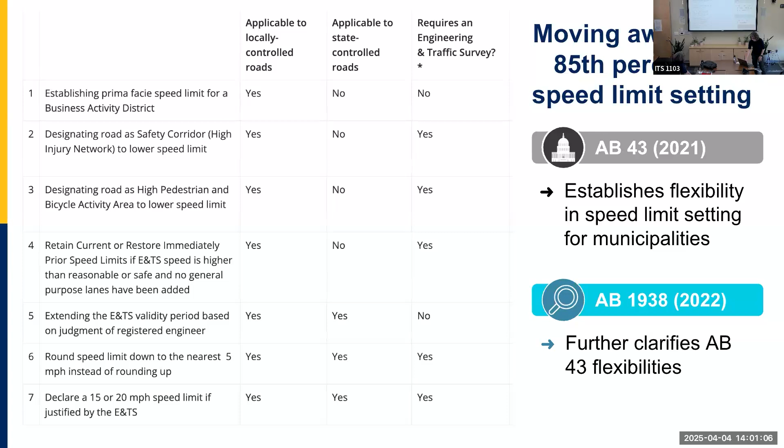Now I'm going to talk a little bit about my projects related to this. This is not research work. This was some education and engagement work, not so much on changing driver behavior, but we developed some accessible guidance for implementing the changes under AB 43 and AB 1938.

With the goal of helping cities to take advantage of these new flexibilities. The way this was implemented or funded was the Strategic Highway Safety Plan, which is a plan that's required under the Highway Safety Improvement Program. It's a federal requirement to have these plans, and it's basically a plan for the state to reduce fatalities and serious injuries, and they focus on the crashes most associated with those levels of injury.

And so in California, we have challenge areas related to these high severity types of crashes. One of those is pedestrian, and those challenge areas had action items in their plan that addressed creating this guidance and helping cities to implement these changes.

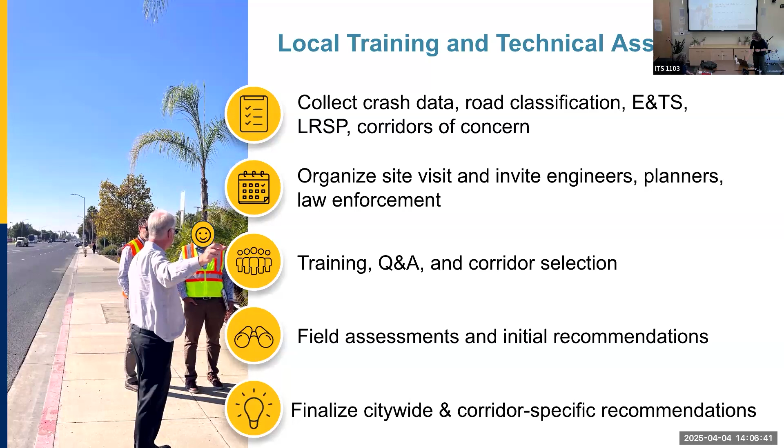So I'm going to jump briefly into something we're working on with Caltrans right now. Caltrans has a number of safety monitoring programs, both proactive and reactive. They look at locations with crash history or attributes that suggest potential for safety concerns, identify those locations at headquarters, and send them to the districts. The districts conduct a traffic safety investigation, and if they identify shortcomings in the design, they make recommendations to install countermeasures. Those are generally automatically approved for funding.

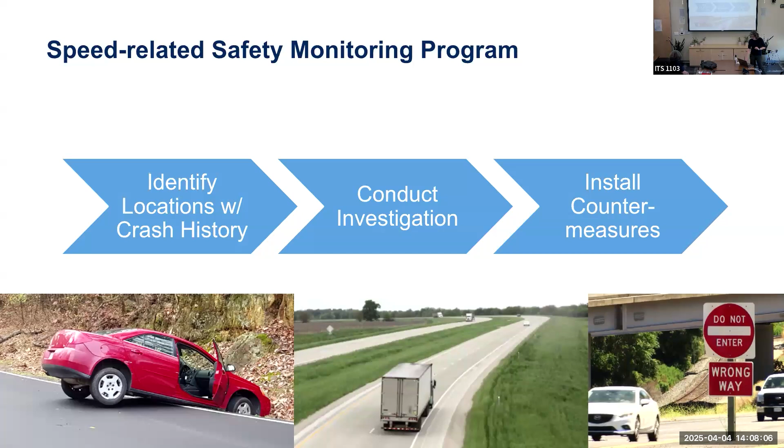And then working with the California Office of Traffic Safety. Are folks familiar with OTS? They're our state highway safety office, and they receive funds from the National Highway Traffic Safety Administration. If you're familiar with the Safe Systems Pyramid, those are some of the higher effort, lower efficacy things, but we have that funding, and it does have some impact.

For those efforts, we were looking more at road user attributes that might allow us to target education campaigns to those who might be most influenced to reduce their speed, or might have the greatest impact. Then the CHP report would look at road conditions and the types of conditions that would be appropriate for targeted enforcement to have the greatest impact.

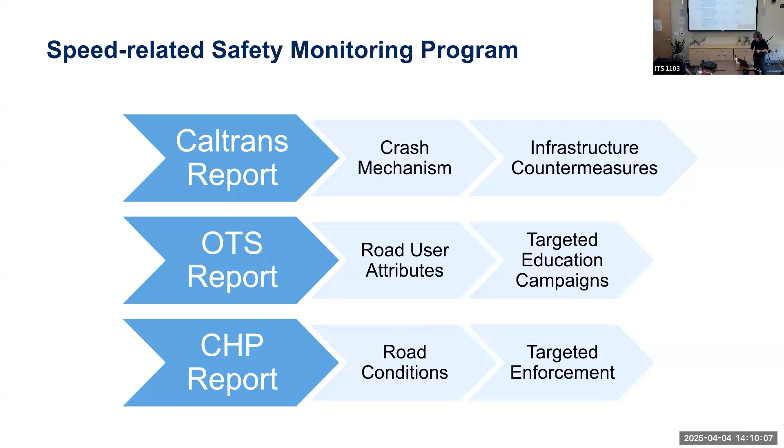So we're in progress on this project, and here's some of the data we've seen. The bar on top shows the types of speed-related fatal and serious injury crashes on non-state highways, and maybe more interesting is the state highway locations. Just to be clear, state highway isn't necessarily just freeways—you have urban arterials, expressways, and rural highways that are just two lanes, which is much of the mileage of the state highway system, connecting the urban areas in California.

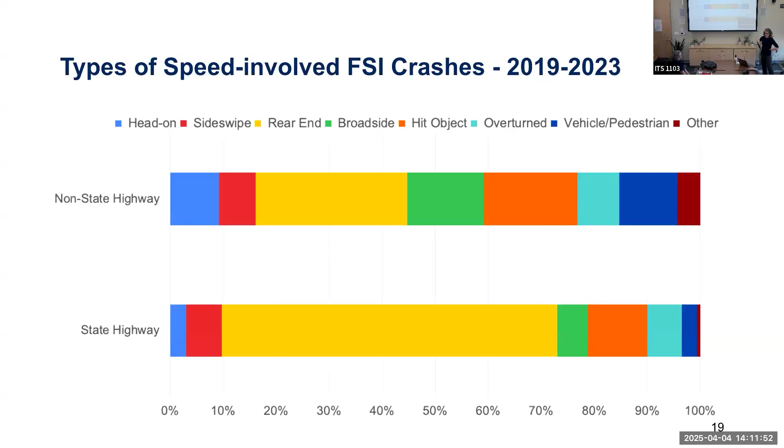You'll notice that for state highways, most of these speed-related crashes are rear ends. For non-state highways, it's still mostly rear end, but next you have hit object and broadside. I'd say broadside is more prominent because you have more intersections on non-state highway locations. But rear end, I have a suspicion, especially on freeway locations, might be back-of-queue crashes, where a driver isn't necessarily going over the speed limit but didn't see the queue forming in front of them and didn't stop in time.

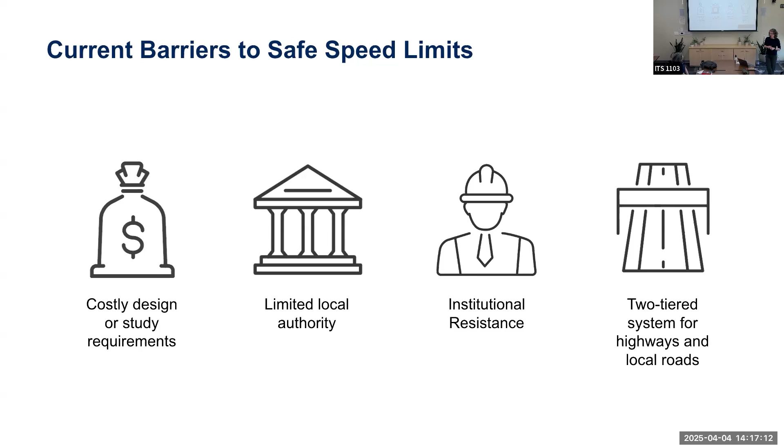With AB 43, those changes I talked about applied on local roads, and only some of them applied on state roads. So there's this two-tiered system that makes it difficult for cities that want to reduce speeds on their arterials that have the highest crash rates.

So we did stakeholder interviews and a survey. We talked to practitioners and stakeholders around the state, and we identified a couple areas of agreement: that these two bills were a step in the right direction, and that it is problematic to have this two-tiered system. There wasn't agreement from everyone on the need for reform.

And what we saw is that the folks who worked for the state DOT saw less need. Our thinking is that if you're conducting engineering and traffic surveys on rural highways, maybe the 85th percentile approach isn't the worst thing. These are locations that don't really have mixed traffic, so drivers are probably relatively okay at determining what speeds are appropriate on those facilities.

But the practitioners from cities and counties were less taken with the 85th percentile approach.

So we worked with Fehr and Peers on the case study portion of this study, and they did a lot of work looking at what jurisdictions around the US have done to better align with the safe system approach on speed limit setting. I wouldn't say there's anywhere in the US where they're fully taking this on, and part of that is requirements with complying with the MUTCD. I think that's going to change some potentially in the coming years.

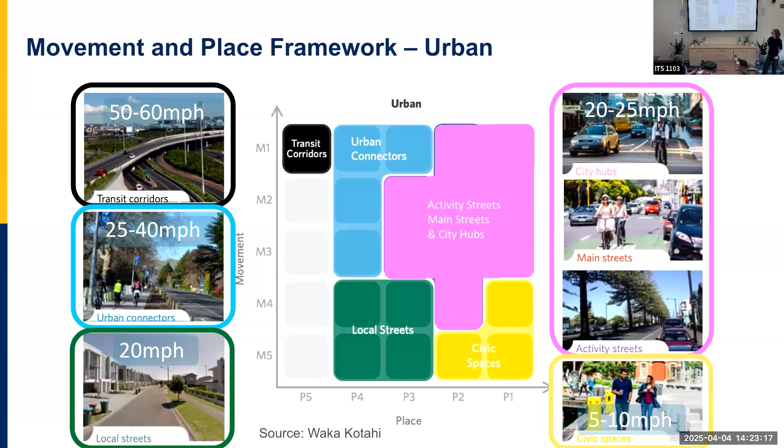So for this category of street, you'd have a baseline of 20 miles per hour as your speed limit. This is a speed where most pedestrians or bicyclists are going to survive a crash.

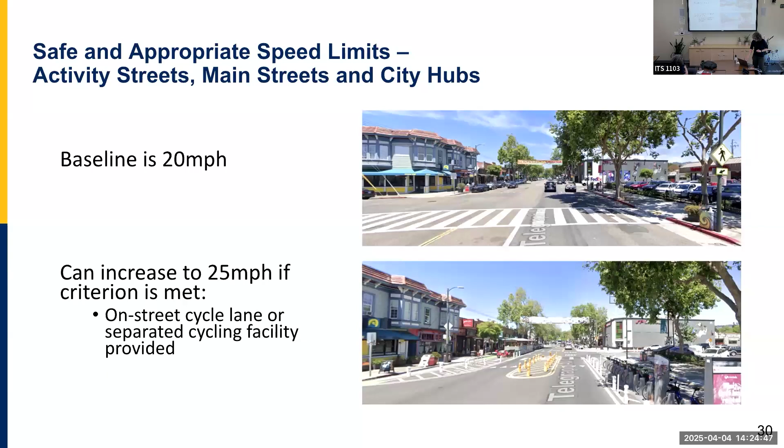The interregional connectors are maybe what we would have as expressways. So those are almost like freeways, but they're not elevated because they're in a rural area and they don't need that separation. I'll just show an example of how their framework would be applied on a rural connector.

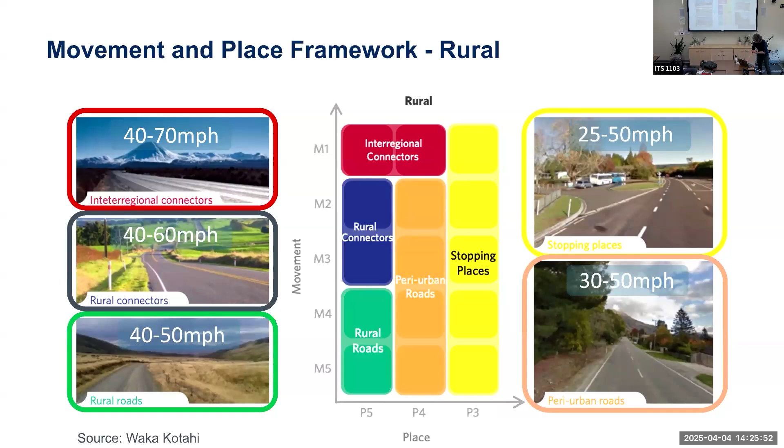So rural connectors are sort of 2-lane highways that have moderate speeds. The middle image is what I would put as more of their baseline speed, around 50 miles per hour, and that is a road that is sealed with a marked center line and an edge line.

So you would consider reducing the speed there if it had a tortuous alignment. This example is a highway that's going through a mountainous area in the state.

And then the bottom one is you could increase that speed if you added a median barrier. So the determination for speeds here versus in urban areas is more about preventing the conflicts between cars, and a median barrier is going to prevent crossover crashes, which are the highest kinetic energy crashes that you're going to see on these rural roads.

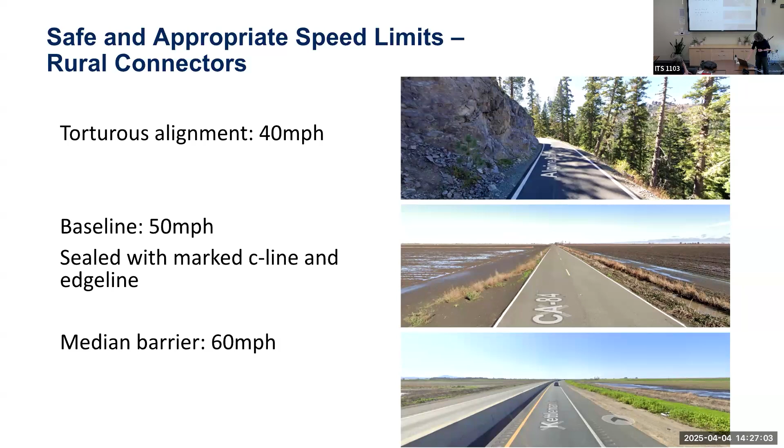So what would this approach mean for California? I think of it as flipping it on its head. What we have now is that the speed limit is based on driver behavior, and if you want to reduce the speed limit, you have to install traffic calming countermeasures to achieve that desired speed. But this would be moving to a case where the speed limit is set to minimize risk of fatality or serious injury. So if you have an operational need to have higher speeds on a road, you'd need to install safe system countermeasures to justify that.

And if you are not seeing compliance, they do surveys too, but after the fact. They see if drivers are complying with the speed limit, and if they're not, you look at what the speed management countermeasures are. So, I'm not going to articulate this well.

One of the things we got pushback on when proposing this was that it's not objective. How do you make this quantitative? So we found some examples of existing movement and place measures for California. The no-brainer is the functional classification system, where interstates are 1 and local streets are 7, with everything else in between.

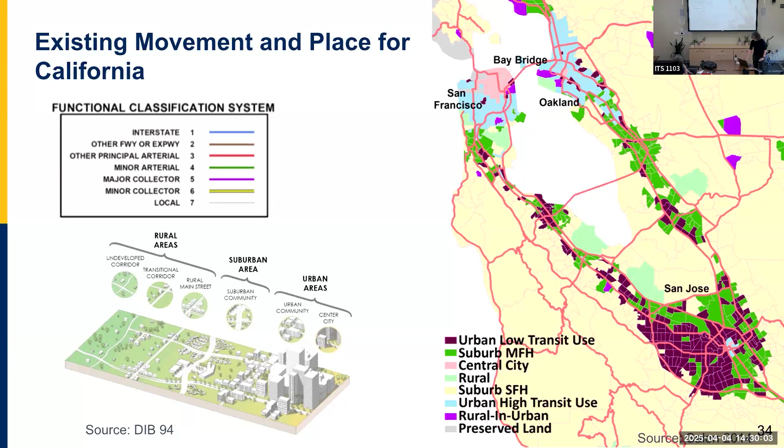We've been funded for a second phase. This is another not-reinventing-the-wheel thing—there's work at the national level on this, and I have other examples I don't have time to present today. Folks are thinking about how to expand the functional classification system to include context and place. There was an NCHRP study several years ago that looked at this.

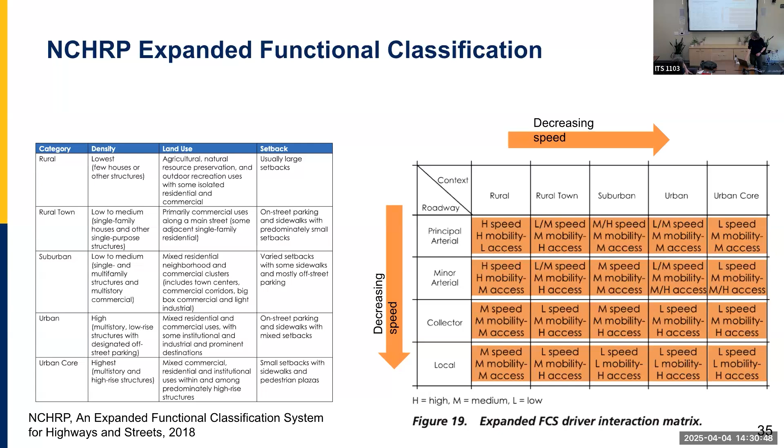They've got context or place on one dimension and roadway on another, and they're talking about speeds. So it's not too revolutionary. I'm going to present some of the very, very early work we're doing on this.

For our classification methodology, we've been funded by Caltrans to continue this work and try to develop this movement and place framework for the state. We're not going to reinvent the wheel on functional classification, but we did decide to merge major and minor collectors, since there aren't very many minor collectors.

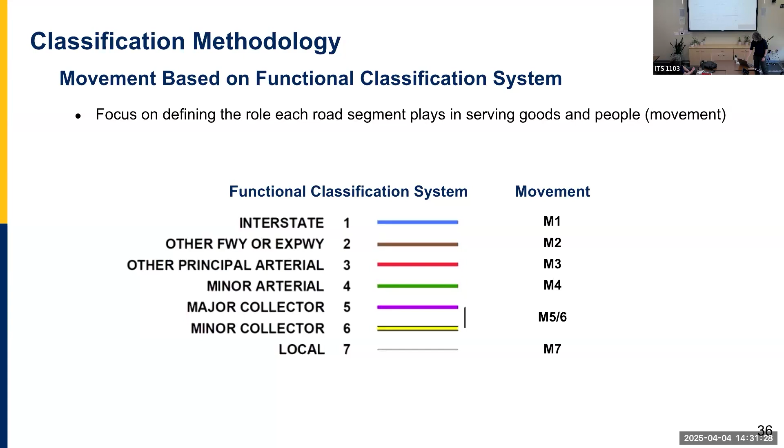To make this digestible for traditional traffic engineers, we're trying to make it very objective—that's not how they did it in New Zealand. I think they focused on a more intuitive planning approach, but we're trying to re-engineer with data that we have available. So we took road segment data and linked that with EPA Smart Location Database data and Esri Business Analyst point of interest data.

We divided these segments at intersections and dropped the ones less than 10 meters so we wouldn't get too bogged down in little details. Then we separated out urban and rural as defined—sort of by the census, but I think maybe it's Caltrans categories.

Then we had our variable selection process, looking at interpretability and correlations, and normalized the scales of the variables so the distributions made sense. Then we had a dimension reduction process, and conducted clustering, which led us to the place types.

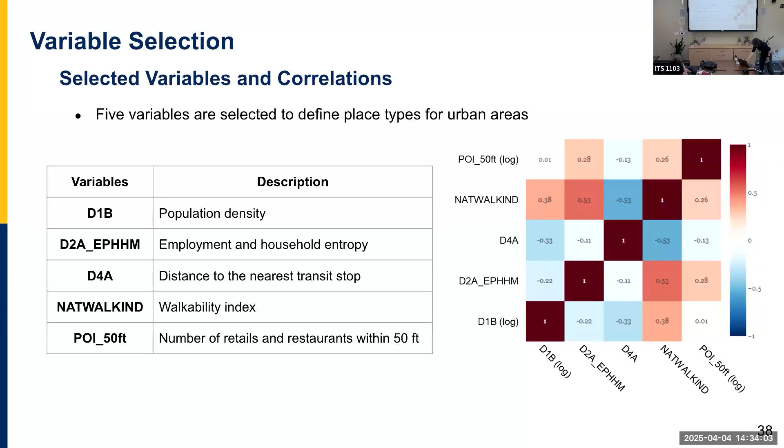We were trying to keep those variables not overly correlated. The walking and the jobs-housing balance were the most correlated of what we had there.

So from our preliminary clustering results, we used HDBSCAN. And what we found was that transit accessibility, basically we decided to create a group that didn't even get included in the clusters, and that's really low transit locations. Those are just the lowest place values, because those are going to be hilly residential areas or more remote areas still within urban.

HDBSCAN was used for determining the other three clusters, and there's a visual representation of those dimensions. For the number of road segments, we have the most in P3, which is the medium low place, and the fewest in P1, which is the highest place. I think that's what you would expect.

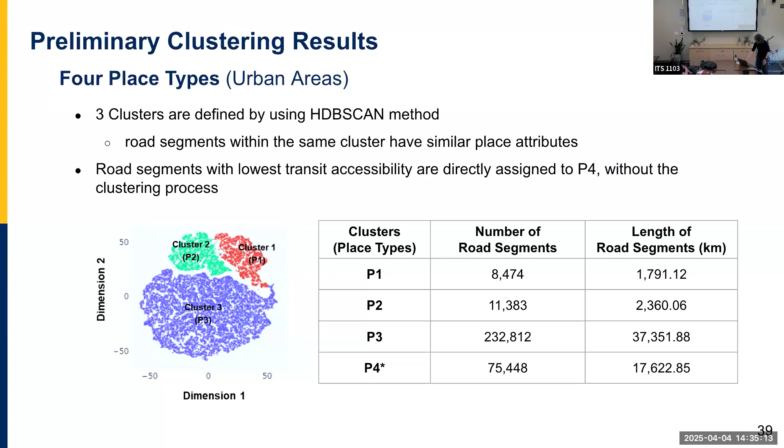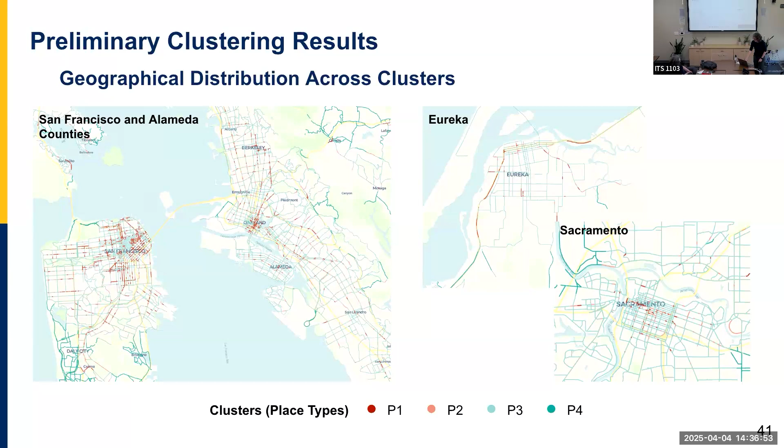So this is the place type without consideration of the movement. But you can see that there is variability within these regions that we're showing. P1, the red, is clustered mostly around the downtown areas where you would expect the high place values. I think that's all I'm showing on this one, because our results are not ready for prime time, but that was a little sneak peek.

So I just want to talk a little bit about what else is happening in California. Some or all of you may be familiar with AB 645. That bill was passed, I think, about a year and a half ago, and it authorized speed camera pilots in six cities around the state. This last year, don't ask me the bill number, but there was another bill that allowed a pilot in Malibu as well. That one is a little different because it's focused on the Pacific Coast Highway, where there was a particularly horrific pedestrian crash that happened with an egregious speeder, I think in '23.

Remembering the safe systems pyramid, which I'm going to show on the next slide again, speed limit setting is in this active measures level. So it's not something that should be happening independently. You need other countermeasures and policies that are going to prop up those speeds. But having the appropriate speed limits in the first place is really important so that something like speed cameras can actually prevent the egregious speeding.

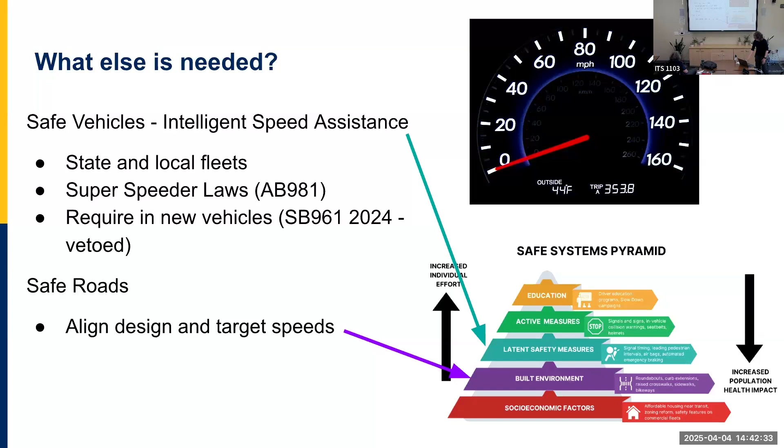The other thing that I think is really important in terms of safe roads, and this is in your built environment layer, so lower individual effort and higher efficacy, would be road design and aligning design speeds with the target speeds of those roads. Because that's a problem we have everywhere, where roads are over-engineered in the name of safety. Ironic, yeah. So that's a rethinking we need to do.

So that's all I have, and I wanted to acknowledge some of my collaborators on this work, my team at SafeTREC, and I think all of this research was funded by Caltrans.

Questions for Julie? Certainly. Oh, there we go. Eilish is not shy.

I had one question about how you're categorizing the causes of the crash, but you're saying they're speed related. So does this mean that there was one cause, so just a collision, and also someone was going too fast? I was a little confused about that too.

When we define something as speed related, there are two variables we're looking at in the crash data. One of them is primary crash factor, and the other is other associated factor. The primary crash factor is sort of like the last thing that triggered that event, when it's speed for the at-fault party. An other associated factor could be with another party in the crash who did not cause the crash. So say it was a DUI, but another party was speeding, that might be an other associated factor that would affect the severity.